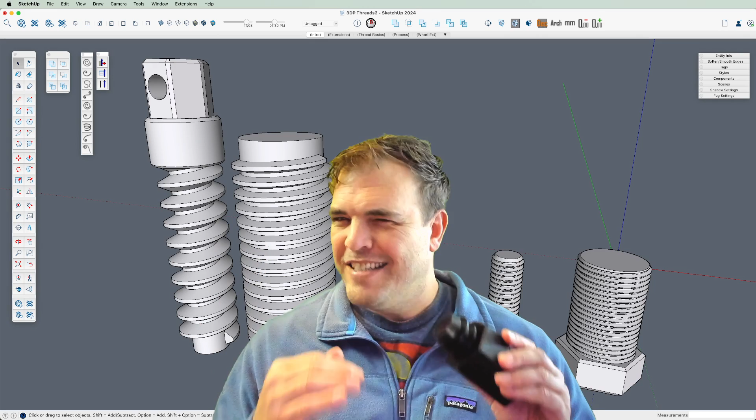Hey y'all, my name's Tyson, and today let's talk about creating real, usable, 3D printable threads.

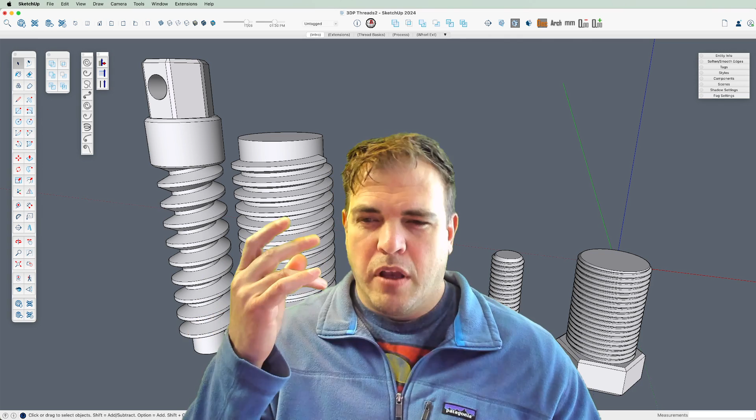We want to make working threads, exterior and interior, not just any threads, but we're going to talk about creating your own sizes, and also being able to create real standard sizes that work with some standard hardware you can find out there. This should work in imperial or metric, and we'll cover this in two videos. In the first video, we'll cover the essential things you need to know and how to create generic threads that you can print. In the next video, we'll go into standard sizes and how to create threads that match up with real world standards.

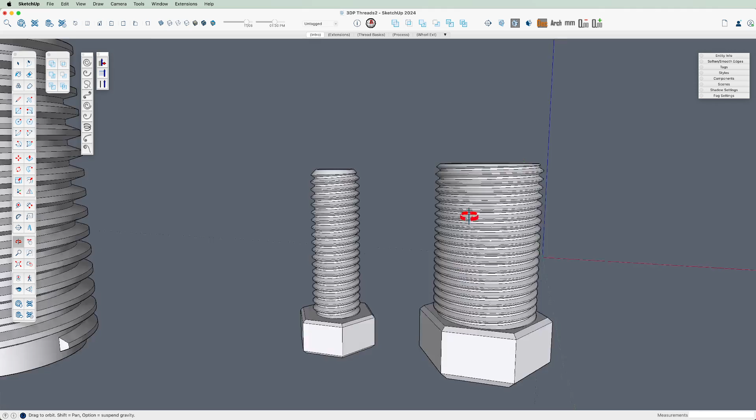So this is just an example of some of the things that we might create, different sizes. These ones are generic, just made up ones, and these ones are more examples of real world size threads. We're going to be able to create both. In this first video, we'll talk about the basic understanding you need to create something more like this. In the next video, we'll do something more like this.

A few things to start: this process relies on extensions. First, you need Cleanup and Solid Inspector - those are useful anytime you're dealing with 3D printing. One method we're going to explore uses Curve Maker and the Helix version of it, and the Upright Extruder from Christina Eneroth. We're going to focus on those more in the next video.

In this video, we're going to explore the Whorl extension. The process is going to be fairly similar, but we're just going to show both so you have those options.

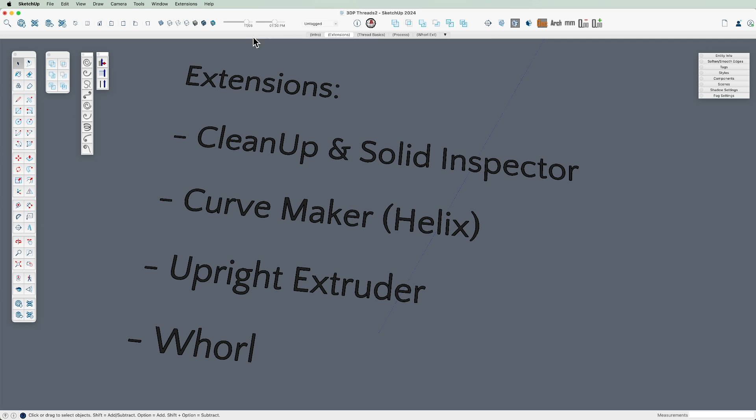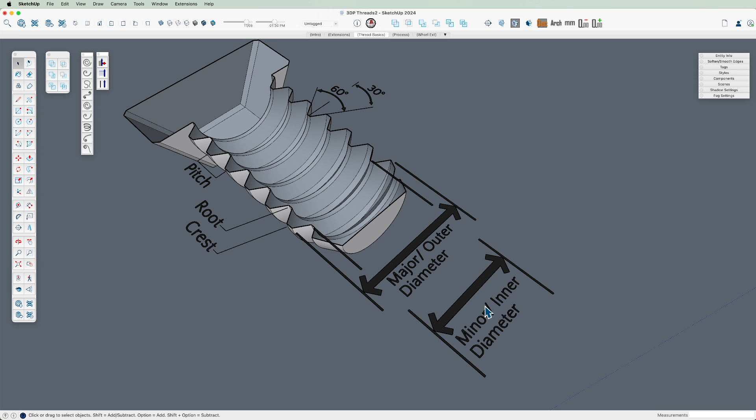If you've never messed with threads, here are the basics of thread geometry and how threads are made. You have your outer or major diameter or radius, which is the outside of the threads, and the minor or inner diameter, which is the inside, or the root - another common term you'll see. The root is the inside part of the tooth, and the crest is the outward part of the tooth.

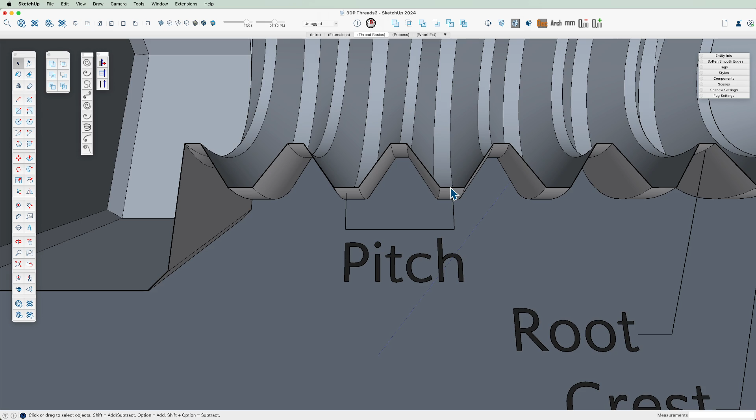Another thing you absolutely need to know is the pitch - the distance between each of the teeth, measured between centers. Another thing commonly used is the angle. A very common angle is 60 degrees between teeth, both in metric and imperial. That's pretty standard for most general purpose screws or bolts.

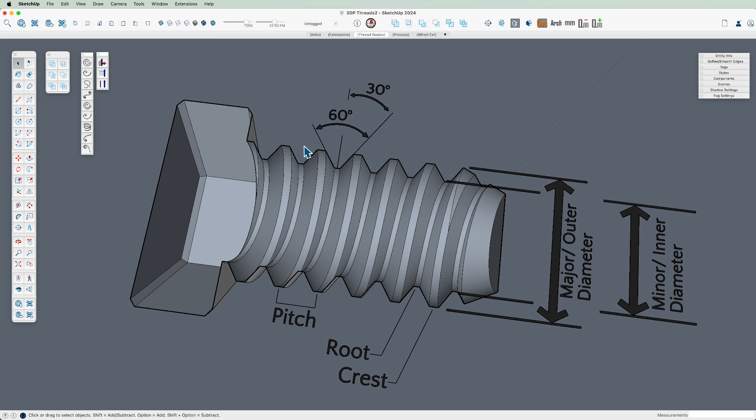So we'll be using 30 degrees a fair amount. It's just a good place anyway, and it's also nice since we're going to 3D print these - 30 degrees is an angle that's typically doable by most materials and printers without support, which would be ideal for us. So those are a couple of the general terminologies.

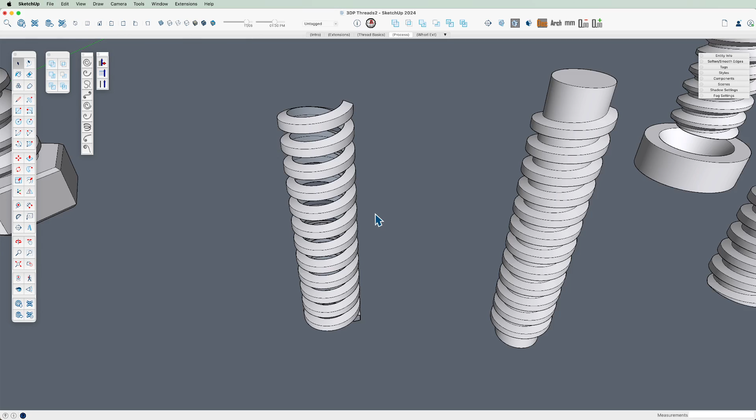And the process that we're going to do, to overview it, is like this: if we want to create external and internal threads, we always start by creating external threads first, and then we're going to use those to create everything else.

And the process is similar. This was created with the Whorl extension. But if we use the other process where we're drawing a helix, then we'll be using upright extruder to create a similar shape as this.

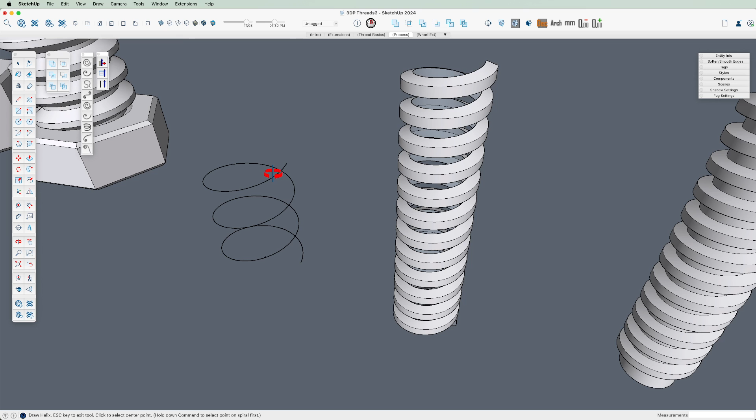Like I say, we'll do that next time. We're going to explore more of Whorl this time, but this version, ultimately you can get very detailed, and if you really want to focus on accuracy, it probably is the better one, but I still really like both methods, having both.

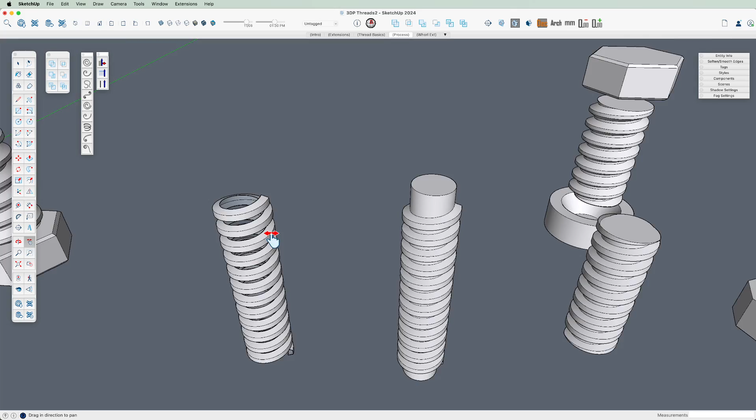So we create the spiral or teeth, and no matter what method you use, they won't be a solid. So then we need to create that inner column, if you will, and create a solid. And with that solid, we can chop in here - I've chopped the top and bottom off using the solid tools.

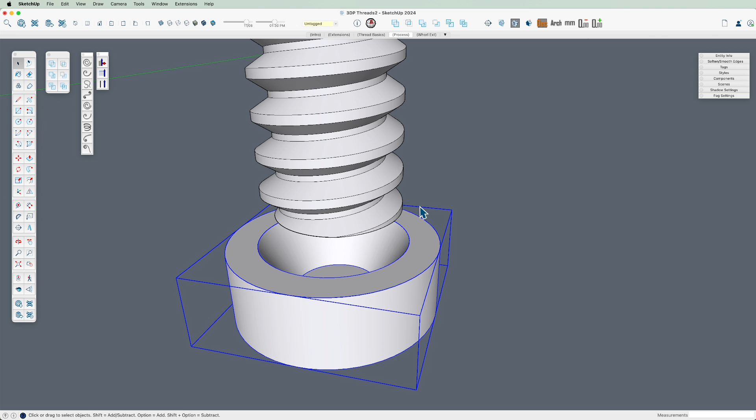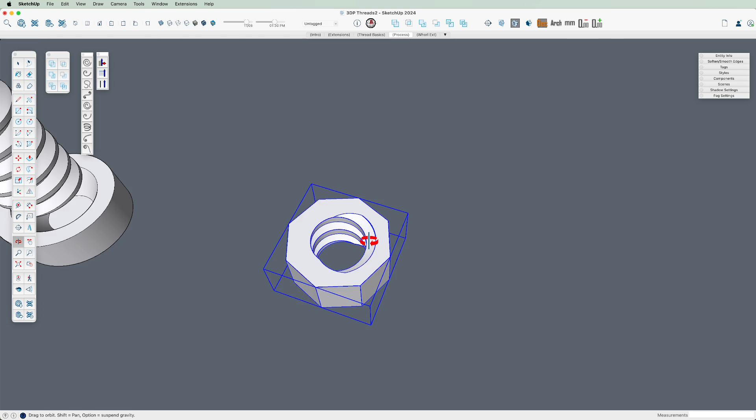If we wanted to create a bolt, we could join another shape with it. If we wanted to taper one end, we could cut away, something like this. So we're just shaping it, and the inner threads will be created again by taking a shape like this and intersecting these. So if I've got my solid tools, I'd say cut this shape away from this one to create the inside threads.

That's the process we're going to be using. Create our spiral, make it a solid, and then manipulate that solid how we want. Okay? All right. Excuse me.

Like I say, we're going to start with the Whorl extension. So from the extensions menu, you can find this, and we're typically just going to be drawing with dialogue. And it's going to bring this up. Well, if you've never used this extension, this may be like, what are all these numbers?

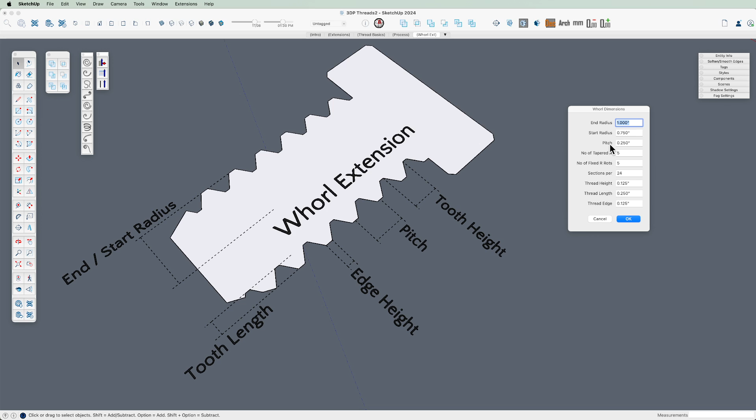So here's what they are. A couple things - I'm going to cancel this. And these relate to what we're talking about here, where we need to know the outer diameter or radius. It's going to ask us to input it in a radius, kind of like SketchUp circles do.

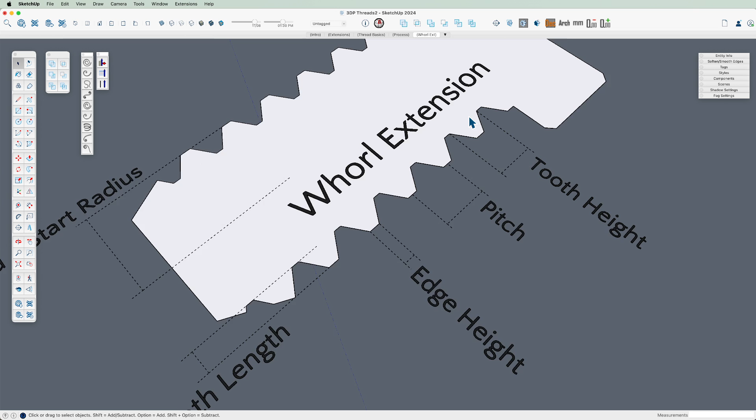The tooth height is not the pitch. Remember, the pitch is the full distance between teeth. The tooth height is just the tooth. The edge height is that crest.

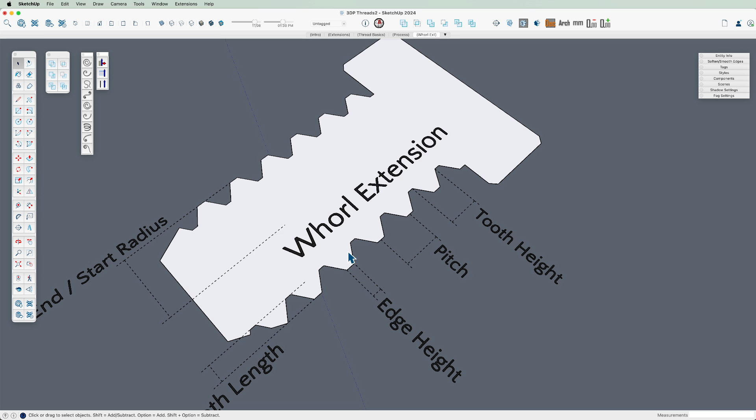By the way, a lot of screws, bolts, they might have a rounded crest or a rounded root. We're not going to worry about that. You can add something like that if you want, but we're just going to be keeping these straight. And finally, the tooth length.

Okay, so let's create a generic, let's say we're creating a large bolt. And to do this, I want to kind of draw out the pieces first. So I'm going to draw, let's make it 1.5 inches, 1.5 wide. That's going to be the outer diameter. So I'm going to draw this.

And then let's say that we want this to be, we could have it like 3 teeth an inch. But let's say 3 teeth per inch. So I'm going to move this up 1 inch, divide this into thirds. I'll just draw these lines to be a simple reference.

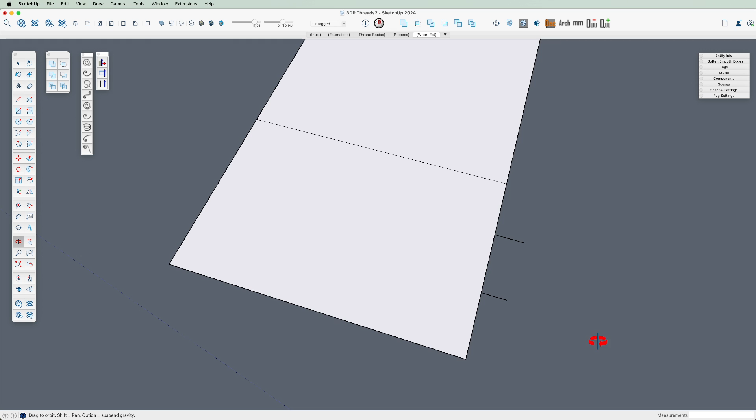How deep do we want our threads to go? Well, let's just say let's just do about 0.2. We're just drawing something roughly here.

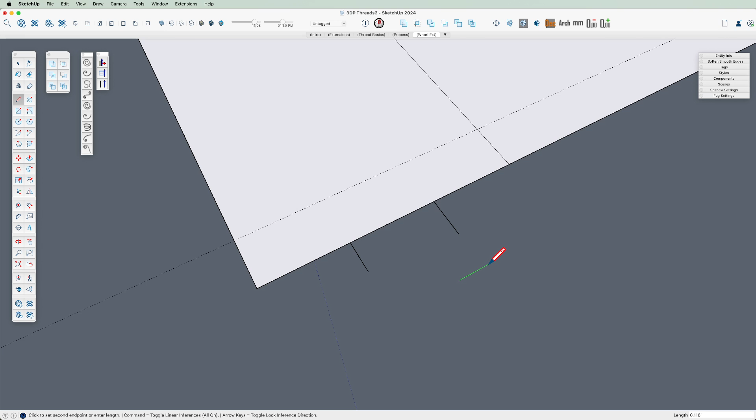We have our crest, we have our root. Let's say now root isn't one of the options that we're going to enter, but it's going to kind of be determined by the other things we create. So let's say 0.1, and I'm in inches, but let's say our root is 0.1. So I'm going to move that there, move it back, and then I want some sort of crest.

Let's use that nice 30 degree. And if we do that, well, maybe I want something else, because it turns out that would give us a very pointed, and I want something here.

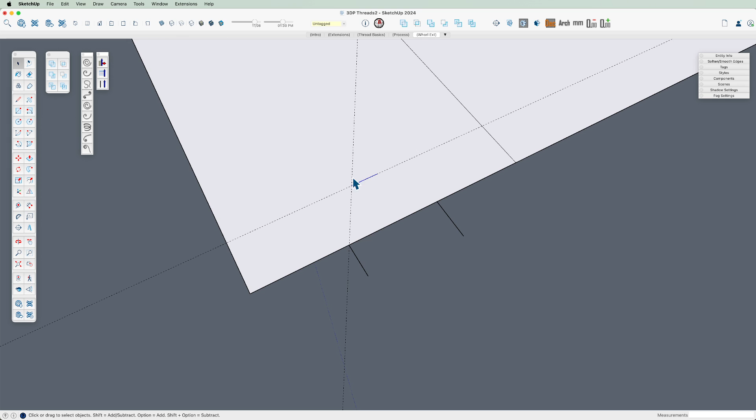So let's reconfigure, let's say this. If we want to maintain our 30-degree angle, then this needs to be smaller. Let's just cut it in half.

So I'm going to move this, lock it right there. 30, 30. I don't know what crest this will give us, but we're going to get that by default.

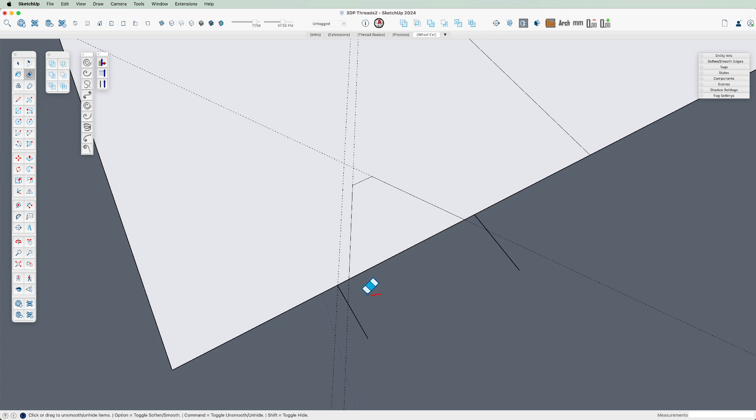Wait, let me not. I want to grab all these and copy them.

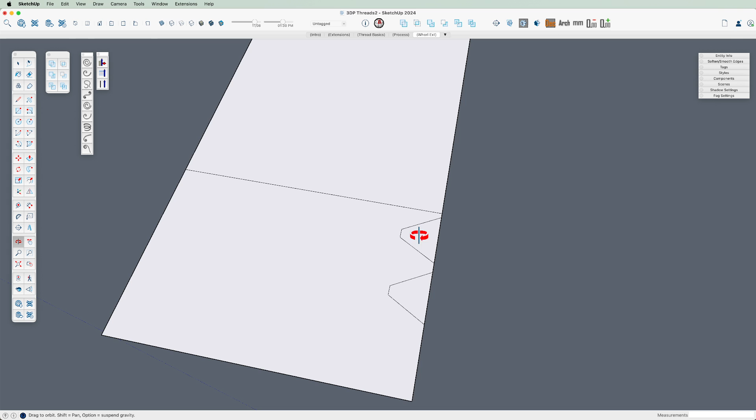Now we can erase some of this stuff. So that's going to be a very thick thread, but that's okay, it'll give us a nice visual. What I need from this is I could select just these elements and copy them over here. These are the pieces I need.

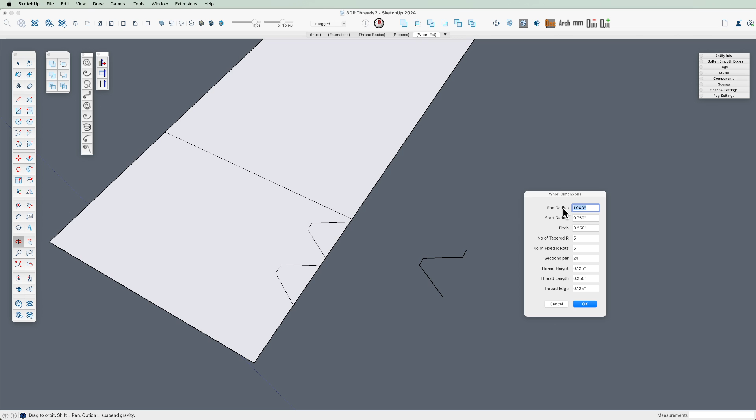This is really deep, I'm not sure how this is going to turn out, but we're going to try it anyway. So if we bring up whorl, what we need is the radius. Now whorl has the option to create a taper. We do not want to mess with that.

So again, we're making a 1.5 diameter, but this is radius, so I need a 0.75. And then we need the pitch and some of these others.

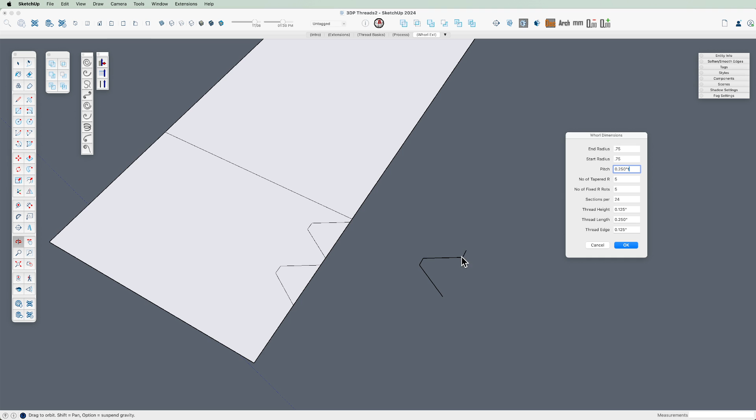Well, with this open, I can't measure or do things over here. So I'm going to cancel this and quick draw myself some references. So with the dimensions...

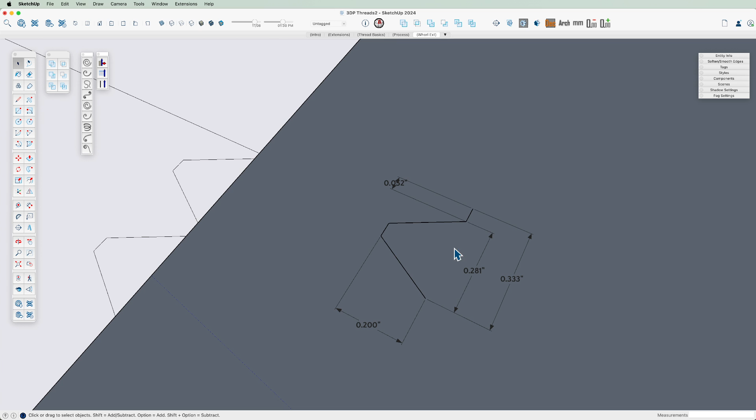So I've got, that's the pitch. This is the tooth length. This is the tooth height. And this is the, oh, I forget what it's called, but this is the edge.

Yeah, edge height. By the way, I get confused all the time like, well, what's the tooth length and what's the tooth height? I find this is one way to remember it: when you're looking at the tooth, if I look at this as an L, that's the length right here. So that's how I remember length versus height.

All right, with that, we should be able to finish this out. So let's go back. All right, our pitch is point... we can probably round all these to the nearest 2 decimal points. We do not want any taper. This is the number of rotations. So tapered rotations, none. Start and end radius, we want that to be the same.

Pitch is 0.33. Number of fixed rotations - now I find it'll take a little bit longer, but if you know you want, we said we have 3 teeth per inch, and let's say we wanted a 10-inch bolt, then we should put in 30 rotations here. Or we can kind of merge geometry later, but you may want to just put it in from the start, at least on this one.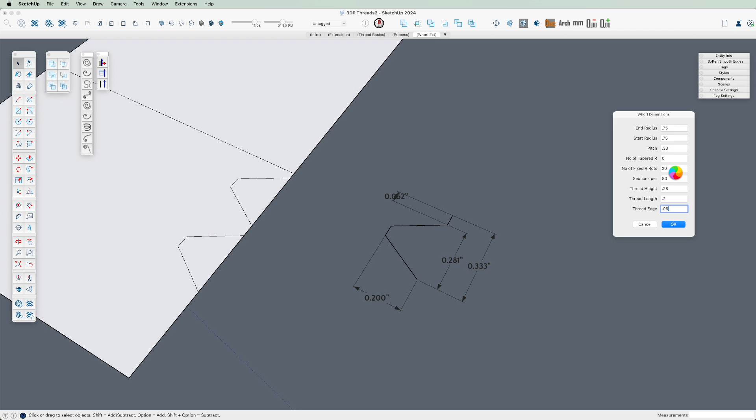Okay. Because we've got 20 rotations here, 80 sections, it is taking a few moments. That's okay. It should drop it right here at the origin in your model. And let's look at what we got.

That looks pretty awesome. The first thing we want to do from this point, I like to run cleanup - extension cleanup. I'm going to run this with my keyboard shortcut from now on, but smooth edges, erase stray edges, repair split edges, merge coplanar faces. Let me run cleanup, and it's reduced the number of edges by a lot.

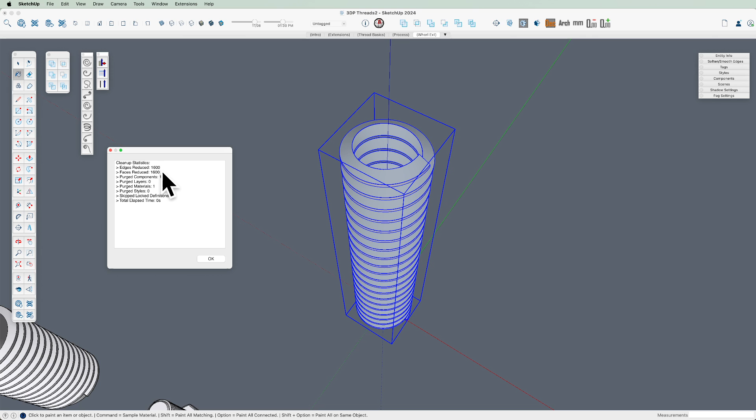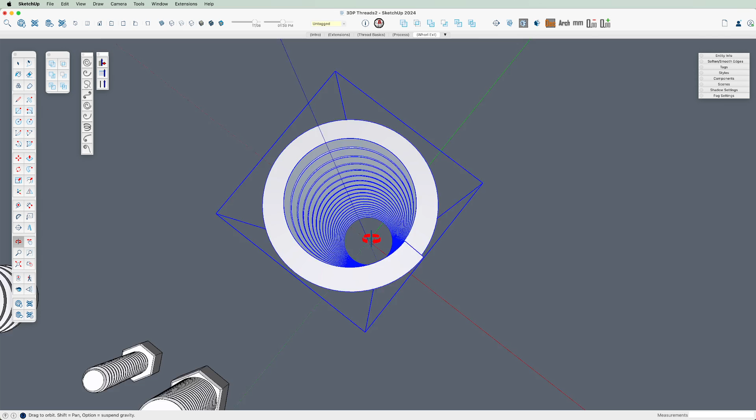It looks better. I'm going to come in here and reverse that face. All right, so now that we've got this, we need to make it a solid. Before we move this anywhere else, it's based right here on the origin, and so this is going to be great to start with.

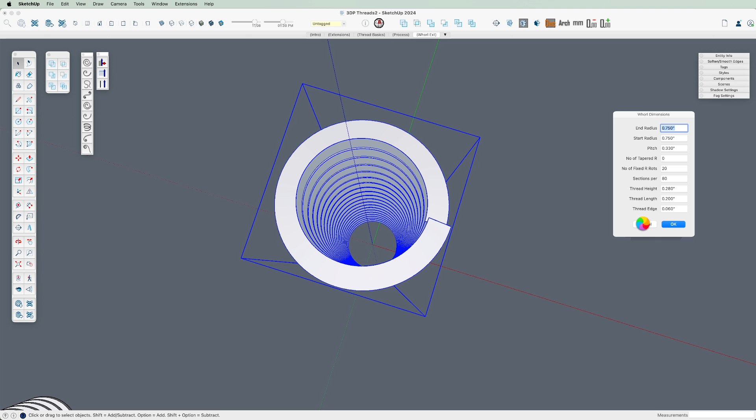If I draw a circle, right now we need to remember the number of segments that we put into the whirl, which was 80. But if I pull this up again, it should remember we made 80, and that's very important. Oh, I don't want to hit OK. Now we're going to have two of the same.

Thank you. We don't need you.

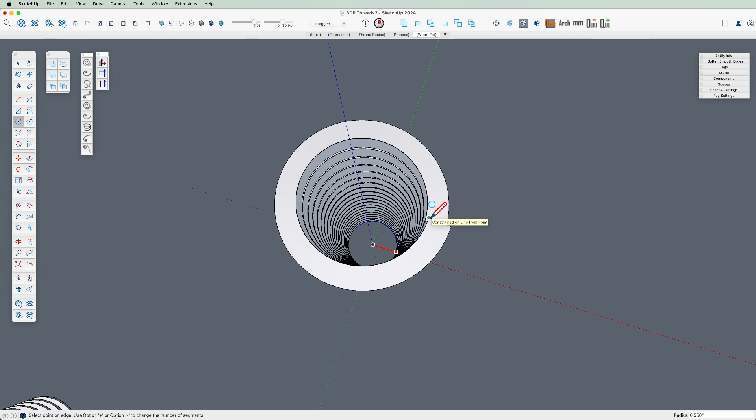I'm going to turn my circle sides up to 80, start from the origin, draw out in the red direction, lock it, and then reference this point so it's exactly meeting up there. If we turn on hidden geometry, the point is we want to make sure our cylinder matches up exactly, as you can see here, with the spiral we've created. That's going to be crucial.

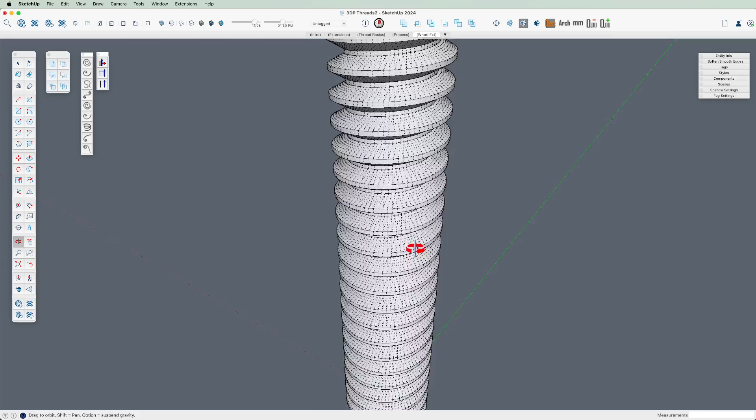Let me pull this down so it extends past, and turn hidden geometry back off. I like to come into the spiral group, draw this edge to close up that surface, and come to the top and draw this edge.

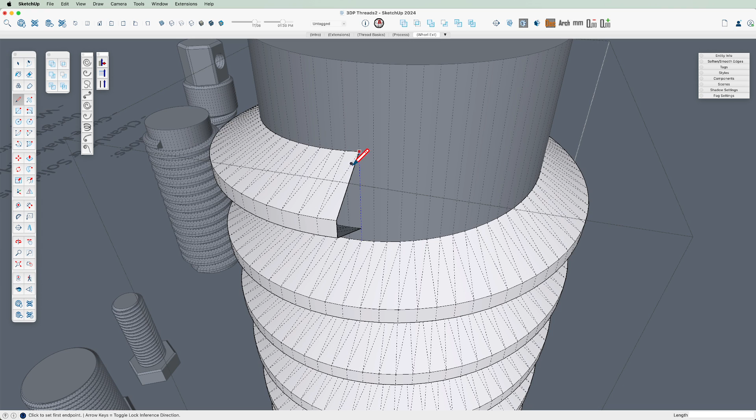Now if we look at this, it's going to draw another one inside here, but that'll get fixed in a moment. Then I take this—if I have grouped this, I ungroup it. By ungrouping them, it should naturally merge that geometry that overlaps together, merging all this together.

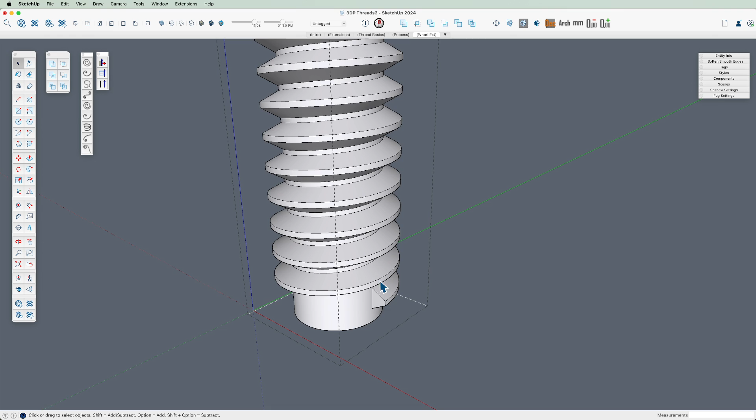I'm going to triple click to select everything, group it, and here I would run the solid inspector, which will repair this. But first I like to come back in and trace those exact same lines I just drew. You can do this in the opposite order and draw these again after solid inspector—I just find I get a little bit better results if I do them first. So with that, I'm going to select this and go to solid inspector.

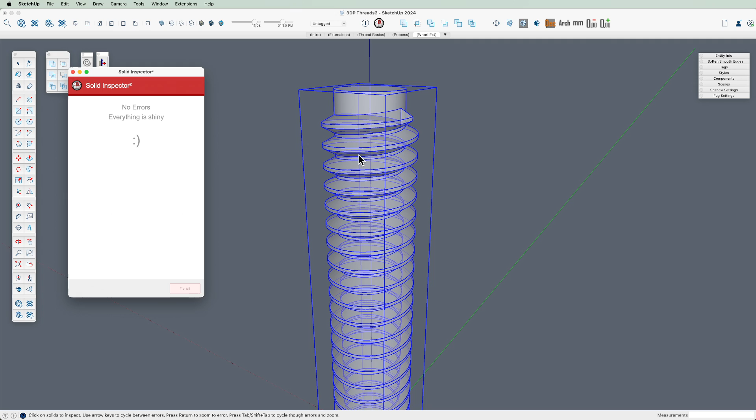It's going to fix a ton of stuff for us. Let me show—see, we have all that leftover cylinder inside there. Let me select it, select solid inspector, fix all, and wow. Love solid inspector. Thank you, ThomThom.

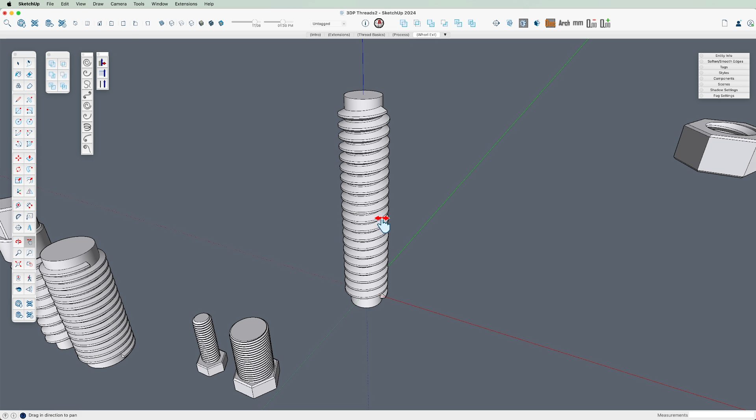And that's it. We have our solid spiral, and from here we can build this into a bolt, or cut this from something else. So let's just create a generic bolt and a generic nut from this, and then we'll call this one good and come back in the next video for some more accurate results.

So for this, here's—okay. I'm sighing a little bit because this may work, we may not have to scale this up, but if you've worked with small geometry in SketchUp, you know that sometimes it doesn't want to behave nicely.

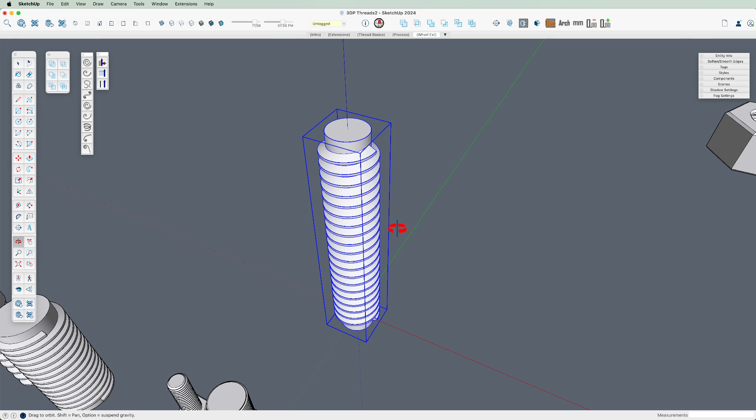So here's a case where I might scale this up before we start working on it by 100, maybe even 1000, so I have this very large geometry that's going to play nice, and then I will scale it back down.

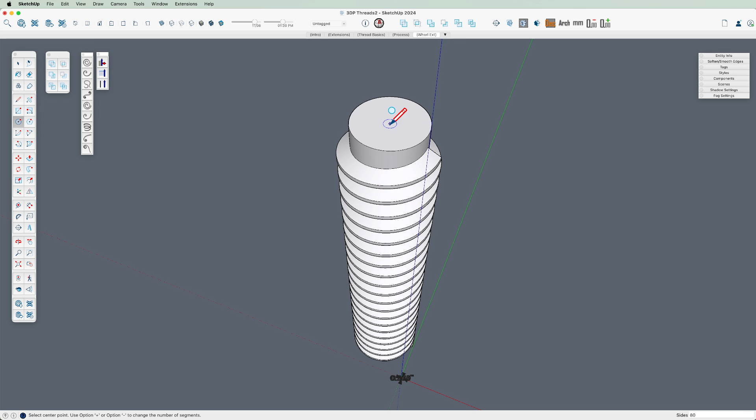So I'm going to create—let's do two things here. Creating just a little bit of a chamfer.

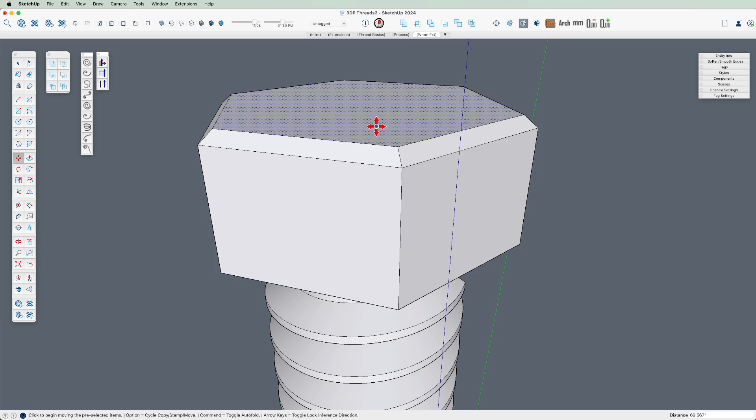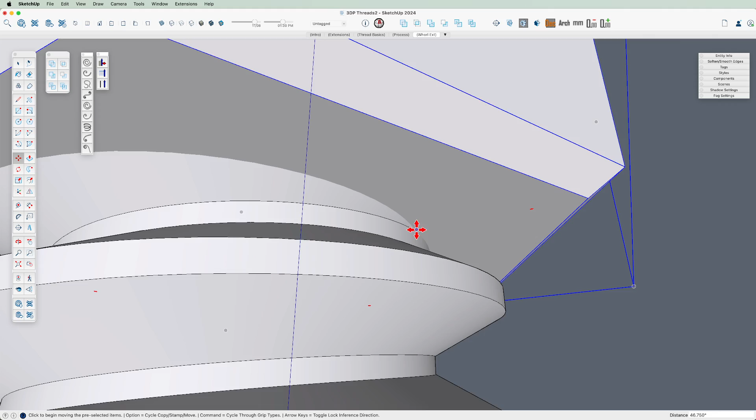And in this one, let's say I want to move this down. I want to overlap this, so I may want—but I'm going to make it go right to that point. You don't have to do that, but that should give me a nice result, and one that if I need to reference, I know I was referencing that red edge. So let me merge these together.

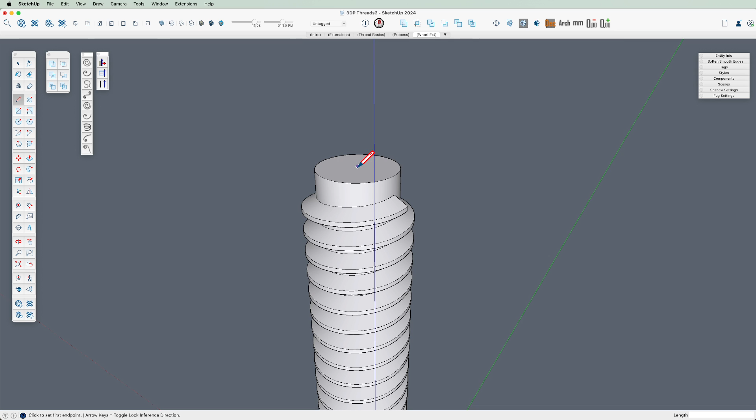Before I do, let me just draw a line. As soon as I merge these, I'm going to lose that center reference, and I still want that. So I'm just going to draw that.

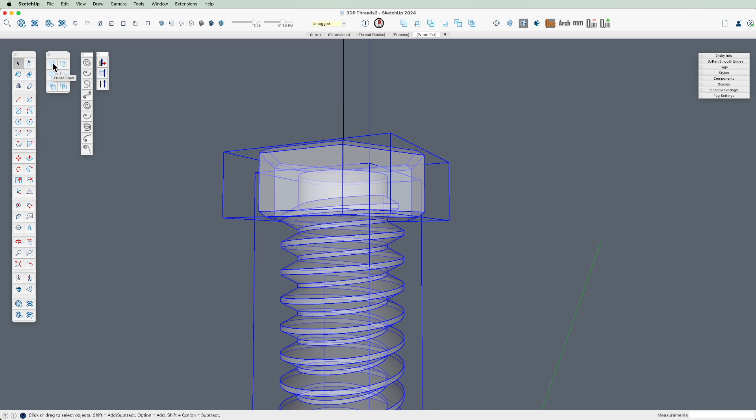Let me unhide. Okay, I'm going to take these two and use the solid tools, merge those into one.

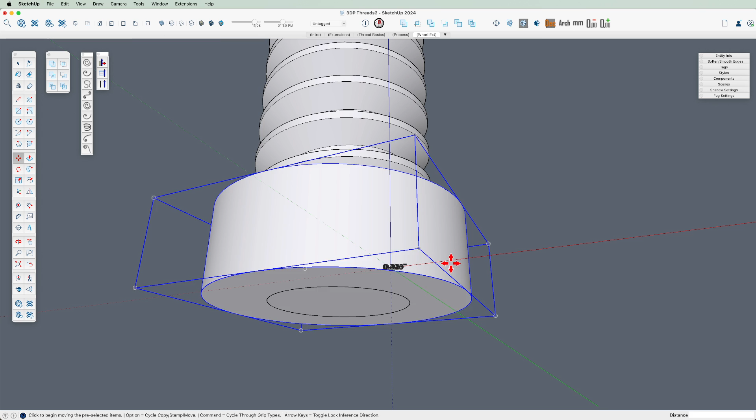And the other thing, I'm going to copy this, paste it, offset it. So we're going to create a taper down here. I don't have anything specific in mind for this, I just want some generic taper.

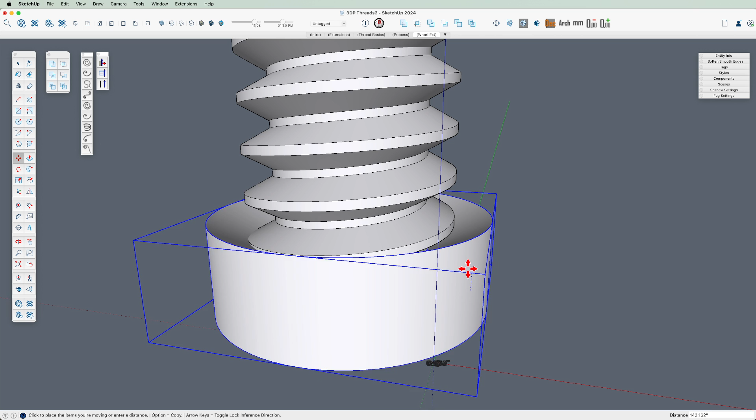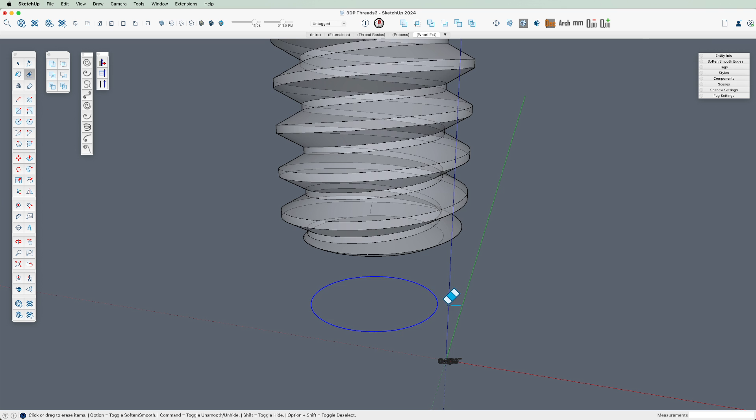So I'll make sure that overlaps completely, and hopefully—let's see, is this a solid? Yep. Is this still a solid? Yep, okay. Let's have a look—let's subtract this from this. And it gives us a nice little taper.

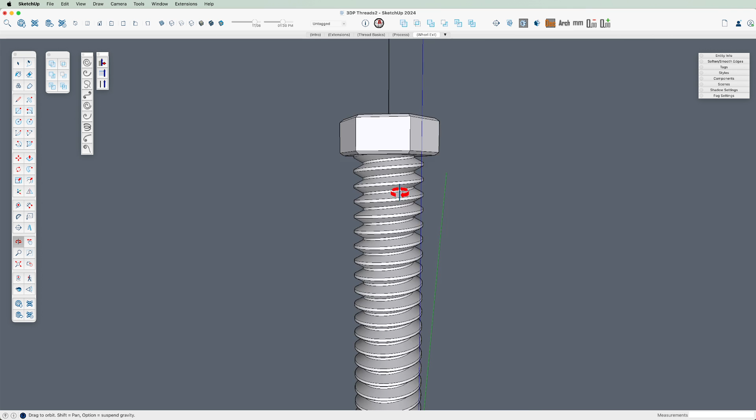And finally, we need to create—these are the outer threads, and we want to create the inner threads. I'll just create a generic cylinder, but obviously any shape we want.

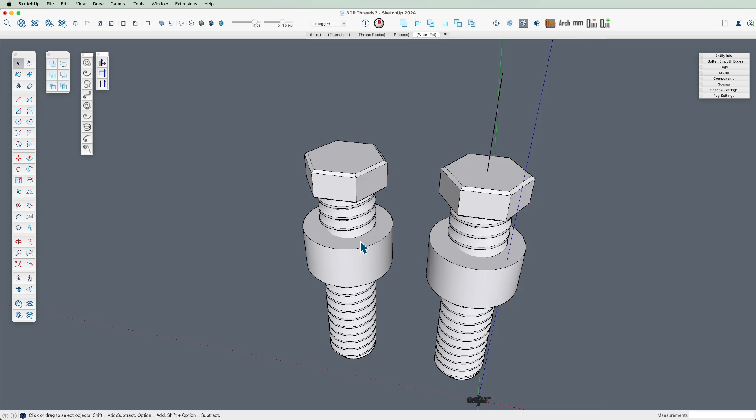So I'll overlap these, move these over here to the side as a copy. Now here's something to keep in mind. If I do this right now, so if I said okay, let's take this from this, it does create those inside threads. Here's the problem.

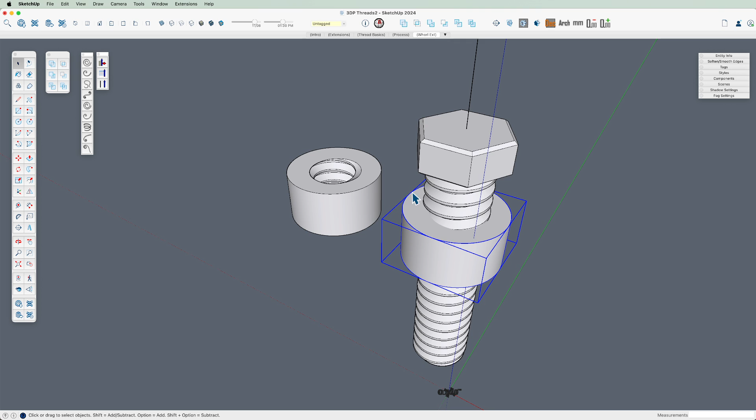Even—we'll scale this back down—but if I want this to work with this, I've just created an exact size reference. I haven't created something that has the tolerance that would be needed both for a real world object, and also keeping in mind I'm going to be 3D printing this, and 3D printing has a little bit of tolerance of its own. So I'm going to undo that.

Now here's the other thing. You might think, oh yeah, this is an external thread, so it needs to be a little bit larger. So let's just scale this from the middle.

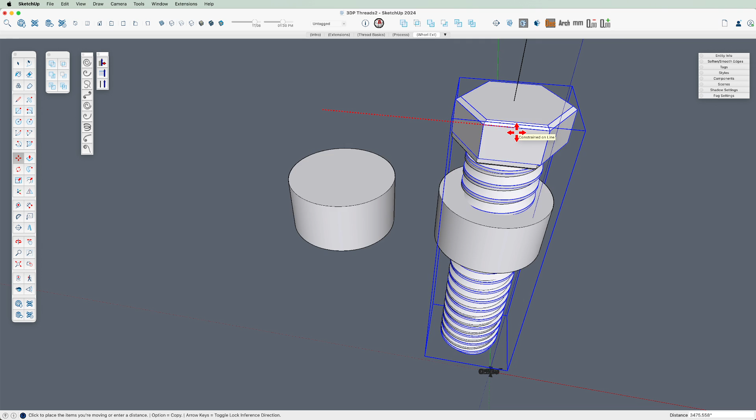I'm going to scale this up just a little bit. But let me show the problem. You need to scale it carefully. I'll show you why here.

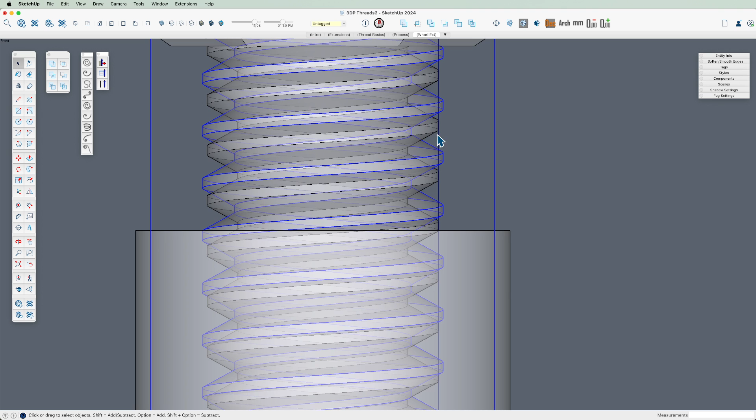That's not going to work, because we were scaling the whole thing. If I turn perspective off and show, okay, that looks good right here, we've got some tolerance. But as we scale up, we can see that by scaling the whole thing, we've quickly scaled too much. We need to scale it in just the X and Y direction.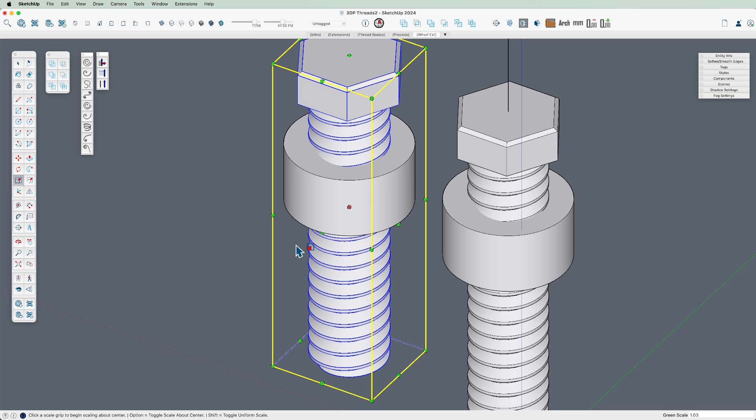So let me undo that scale. What we want to do is scale it, and we can hit the modifier keys to scale from the center, but you see we're just scaling it side to side. So I'm going to scale this up by, let's say, 1.03%, and then make sure I do this in the other direction as well, 1.03%.

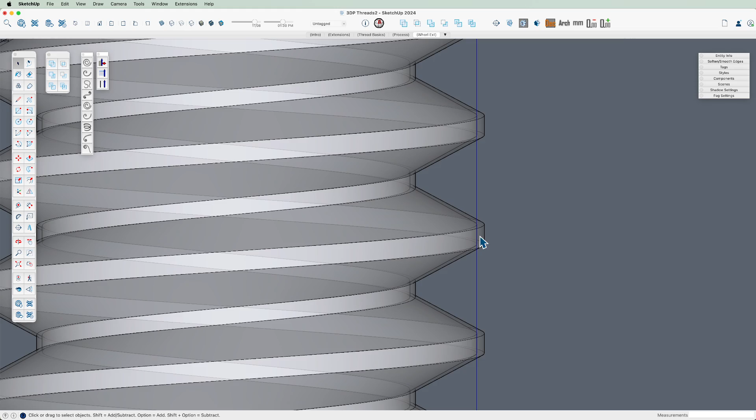Now, if we look at this again, let's go to the front view. Let's turn X-ray mode on. Now you can see that the height hasn't changed, but we have this version here.

I want to point out one little thing. This way of scaling does tend to do this. See how we have a little more tolerance on the crest and the root than we have in the actual tooth.

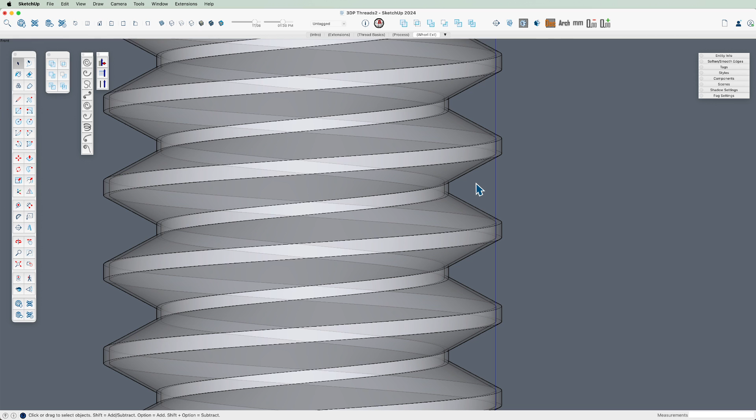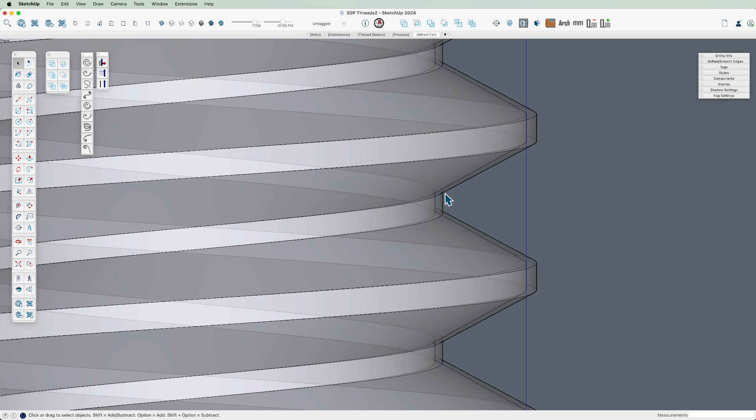In the next video, the next method we explore, we can create something that has an absolutely the same tolerance. This still tends to work based on the tolerance you give it. So it's okay, but just something to be aware of, that if you really had a dramatic difference between your crest and root, you could create a wedge here that may not work very well with this scaling method. Like I say, just something to keep in mind.

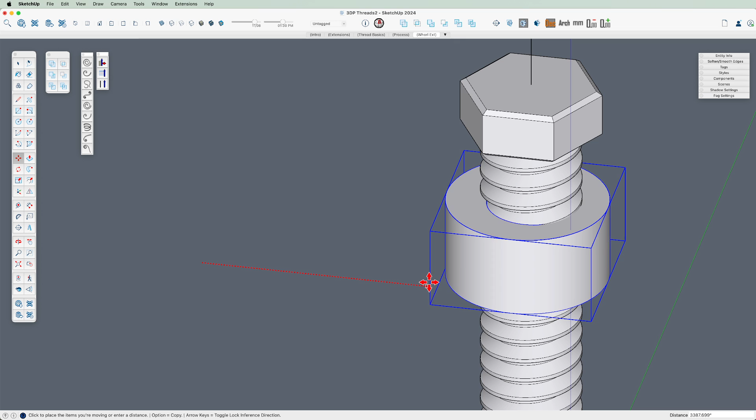But with that, we can finally go subtract here from here. If we move this back into place, and I should have been a little more careful. But we can see we've created inner and outer threads with a tolerance that should work for us.

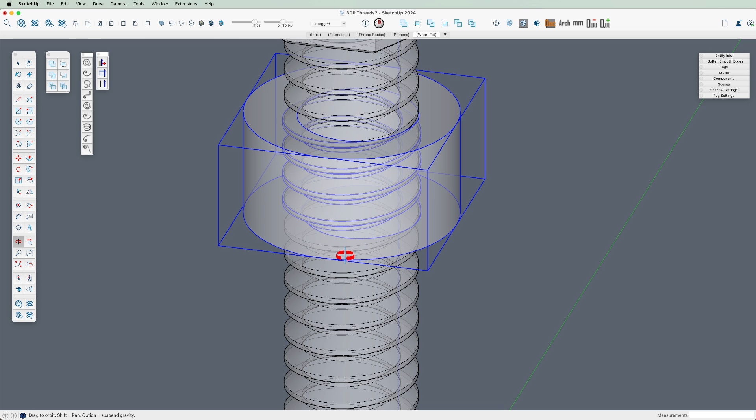Now, again, that tolerance isn't anything exact. That's something that you will have to play around a little bit with. Also, it depends on your 3D printer and your print settings and how detailed you're printing, all those things.

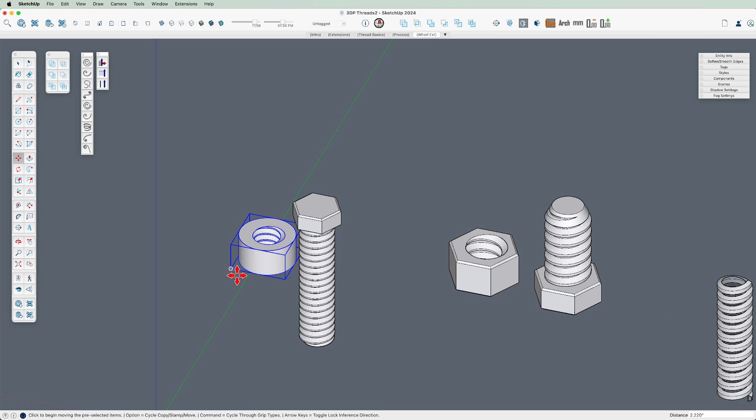But let's scale this back down, 0.001, because we scaled it up by 1000%. Awesome. Oh, where'd it go? Oops. Let's try that again.

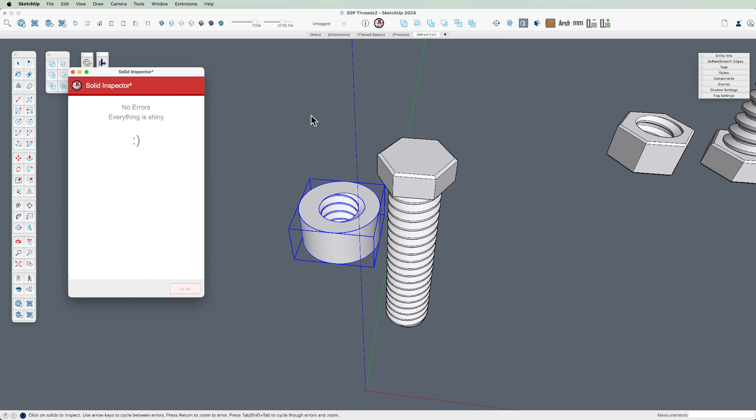One more check. That's a solid. This is solid. We could print these. Of course, to print this, we'd want to turn this around and drop this down to the bottom.

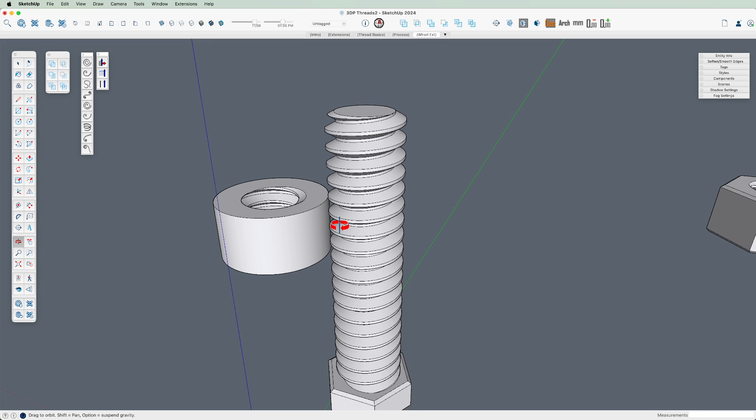Do we want to put a chamfer on this? Do we want to chamfer the inside? We could continue to do that, but that is how you can create usable parts. If I printed these out right now, I would get something like I was showing at the beginning. Totally should work together. I think I've given it a decent amount of tolerance that it absolutely work.

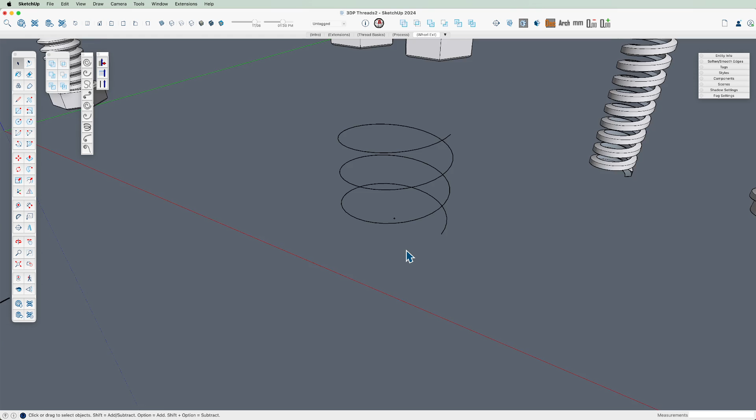So in the next video, we're going to explore the version where we create this by creating a helix and then the shape, and we will build that out ourselves, and we're going to do it with some higher degree of accuracy.

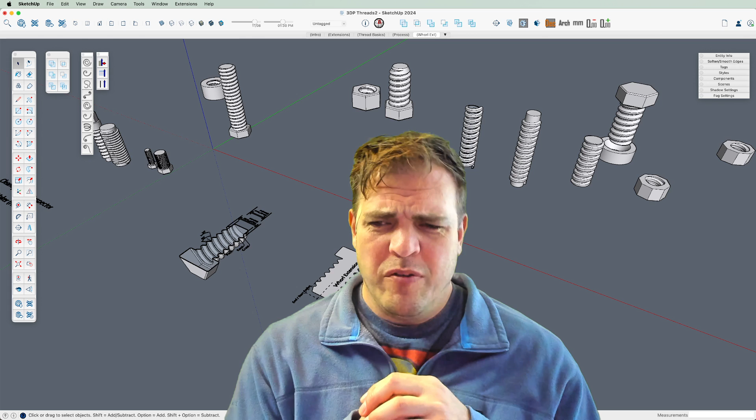Great, we covered a lot, but hopefully that makes sense, and that's sort of the foundation that we need moving into the next video. So hopefully that was interesting, and I really do like that whirl extension. It's not as accurate, like I say, as the next method we're going to use. It doesn't always give you exactly what you want, but for these type of purposes, it's fast.